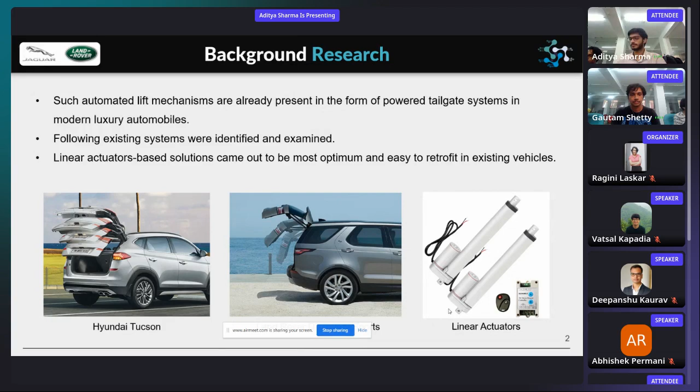One of the mechanisms we ideated was employing a simple slider crank mechanism coupled with a linear actuator on each side of the bonnet. Upon retraction of the linear actuators, the slider moves inwards and the crank moves up, causing the bonnet to lift. This mechanism was rejected due to the significant number of components, resulting in multiple joining points, hence greater losses of energy. This would affect the efficiency of the whole system drastically.

This mechanism comprises a linear actuator whose one end is mounted on the chassis under the bonnet, and the other is mounted on the bonnet itself. The extension of the linear actuator results in the bonnet pivoting around the chassis mount and lifting the bonnet upwards. The mechanism was selected as it consists of the least possible moving parts with which the said actuation of the bonnet can be attained.

Fewer components also implies better packaging and weight reduction. Moreover, the easy availability of the necessary parts in the Indian market further strengthened our conviction to move ahead with this design.

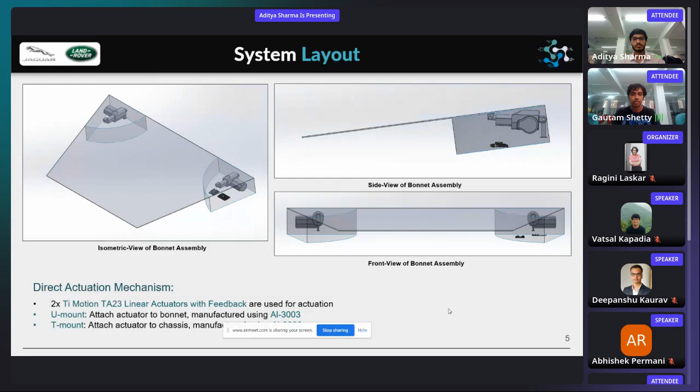The Cytron motor controller is placed on the left side, along with the Arduino, which will run the control algorithms. The Cytron controller will take power from the battery of the car and provide the appropriate PWM signal to the actuators. The IR sensors are also connected to the Arduino, which will sense the gestures and take the appropriate actions.

The powered bonnet can incorporate a gesture-based sensor, which allows automatic opening or closing of the powered bonnet by kick motion. Further, a safety feature can also be included, which stops the closing of the bonnet to prevent injury in case of accidental obstruction. These features would ensure ease of access and safety for the user.

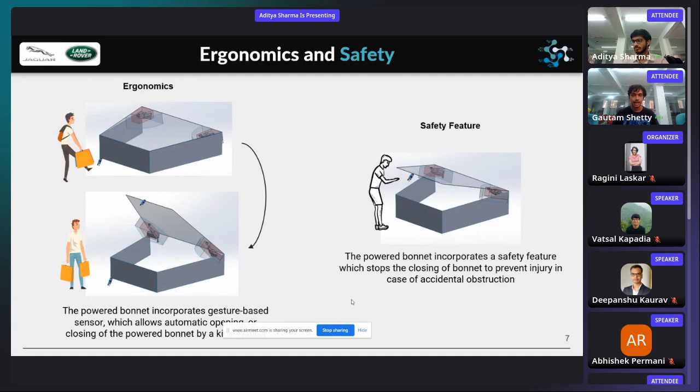In the closed position, we fit the whole mechanism assembly in 32.37% of the total available space. This again was made possible because a mechanism with the least possible moving parts was used.

Going over to the governing equations, here we have derived the mathematical equations necessary to model the physics of our mechanism using the parameters that are available to us. A free body diagram in motion was created to obtain the necessary force balance relations. The Simulink model on the right embodies the final differential equation attained in terms of the variables, that is, the actuator force and bonnet angle.

Another model was created to convert the input length variable from the electrical subsystem into the bonnet angle. The equation for that was derived through the geometry of the mechanism.

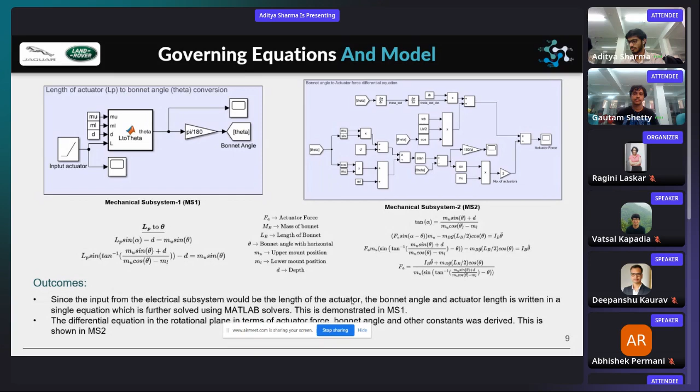Now we will look at the MATLAB scripts that we have developed. The equation mentioned in the previous section is solved here using the fzero solver present in MATLAB. The equation is solved numerically and the solution is usually obtained instantly. The bottom script is the master file, which contains all the necessary constants which describe our problem. The parameters here can be changed to obtain simulation results for a variety of different loading, mass, or time conditions.

Now over to Aditya Sharma.

After developing the mathematical models, we went on to select the appropriate linear actuator for our design. Since each linear actuator had different specifications, detailed simulation was done on each model to check if it was able to meet the requirements. After several iterations, we found that the TA23 linear actuator was able to provide the desired force and speed with enough leeway for further adjustments.

After selecting a linear actuator, we have to decide the exact position to mount it within the given space to us. For this, a 2D SolidWorks sketch was created to identify the optimal point. Two semicircles were drawn on the bonnet, and their intersection defined the viable points for a particular actuator.

These points were then input into a load model to determine the exact mounting positions that minimize the overall load during the entire cycle of opening and closing of the bonnet. In this way, the optimum mounting point of our actuator was estimated.

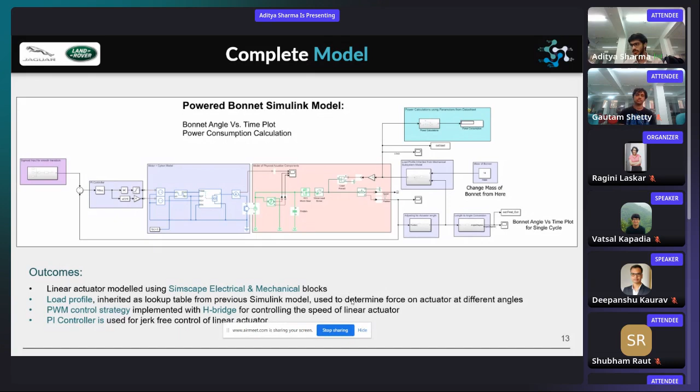Power consumption plot with different mass of bonnet is shown in the figure. It comes out to 300.3 joules for the 14 kg case. Also, the power consumption plot is observed to be almost linear for mass from 9 kg to 14 kg.

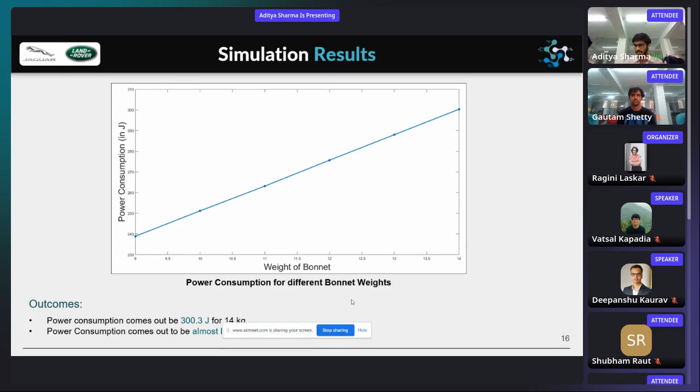The mounts are made up of Al-3003 and under the most extreme conditions of loading as per our design, the minimum FOS came out to be 1.34.

The mounts can be mass manufactured using the CNC machining technique. The simple design of the mounts ensures that the cost of CNC machining does not go very high. These mounts will be welded to the chassis and the bonnet, preferably using TIG or MIG welding.

Next, coming to the bill of materials, we were able to keep the total cost of all the components under 20,000 rupees. Also, all the components used are readily available in the Indian market, targeting the mid to high-end car segment.

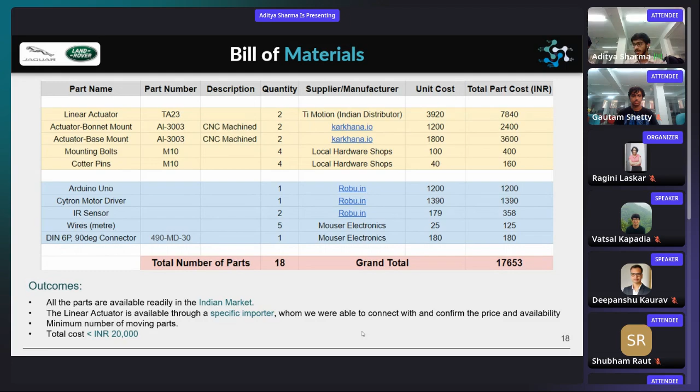The cost for this feature is quite manageable considering the performance offered by our design. It also contains the potential for the company to keep a good profit margin while offering these features to the end customers. The claim points based on our self-evaluation are tabulated in the following table.

Listed on this slide are some references that we used.

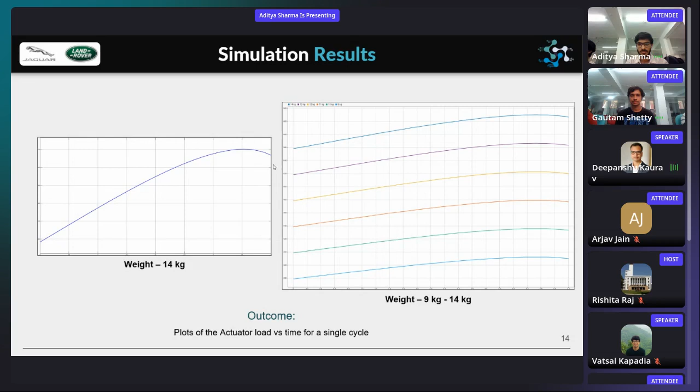Yeah, and another point is that the static load it can handle is much higher than 1000 newtons, 3000 or 4000 newtons. So there we have the greatest factor of safety at the static points. That is for the safety feature as well. Yeah, that's fine. So my question is, let's say you are closing your bonnet, and at that time someone puts their hand. How fast will your feedback system respond to that? Will it be able to stop?

So the feedback system will respond when the bonnet comes in contact with the hand, right? Or is there any other thing? Actually, sir, we have one more thing. We have incorporated an IR sensor. When anyone puts their hand into the bonnet, the IR sensor will sense their hand and it will stop. That's the additional safety feature. Okay, so the IR sensor is on the bonnet or somewhere else? Yes, it's on the bonnet, like here. Okay, this one. Okay, fine.

So a word on that IR sensor. Will the line of sight be sufficient, or how many IR sensors have you used to cover that particular part? For this system, we have used only two IR sensors. For the first case, if you have bags or something in your hands, you can open your bonnet using a kick gesture. And the second IR sensor is for the safety feature. So it's shown in this figure.

So you think one IR sensor will be enough for covering the complete bonnet? Let's say the child has his hand on the extreme right. Will that IR sensor detect that?

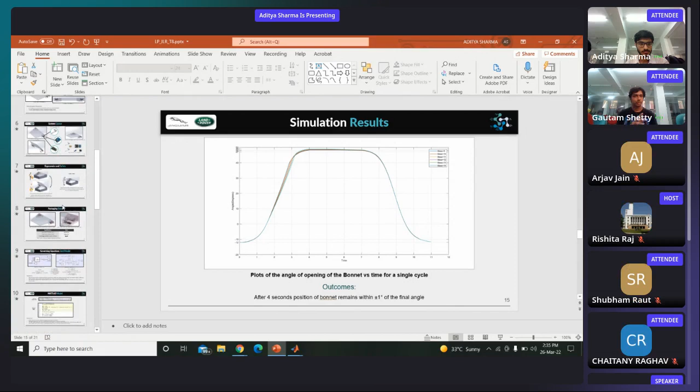So we know the curve of opening and closing. If there is any obstruction, it will deviate from it, and our system would identify it and stop the bonnet. So here comes the role of the linear actuator. Okay, it's basically a second layer of protection after the IR sensor. Yes. And also the potentiometer is for obstruction beyond the line of sight: if something above the bonnet is obstructing it from the upward side, the potentiometer would also identify that and stop the bonnet from further damage. Okay.

A question from my side. This TA23 actuator that you use, what's the fundamental idea? What sort of actuator is it? I know it's a linear actuator, but what mechanism does it use? It is a worm gear mechanism with a lead screw. Okay. And it has a Hall sensor for the feedback mechanism.

So one last question from my end, regarding safety. A lot of sensors and automation sometimes cause catastrophe. Do you have any kind of input for when a car is in drive mode, so it should never open automatically? That would lead to a very disastrous thing, right? Any input in your diagram from either a wheel or engine or something like that? Have you considered that? Definitely, if someone is driving a vehicle, this sensor should not work. This is for the static position of the car. All right.

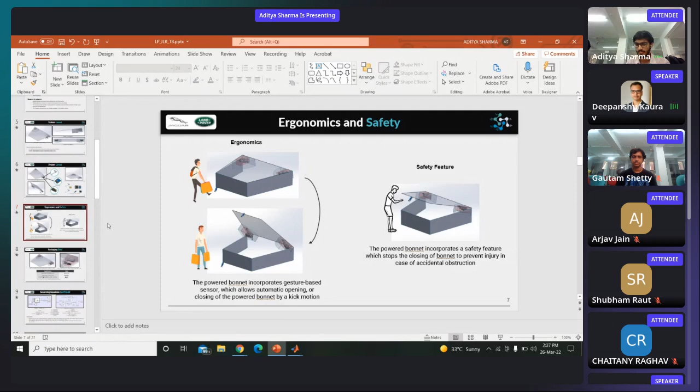If you can just go to the self-evaluation slide that you presented. There you have claimed packaging to be 24 out of 25. From what I see, the linear actuator hinges cover a major portion of the bonnet, on the major length of the bonnet, right? So on the sideways you will have shortage of space. You can't move some stuff sideways because you will have the arm of the linear actuator in that direction. So do you still think it will be 24 out of 25?

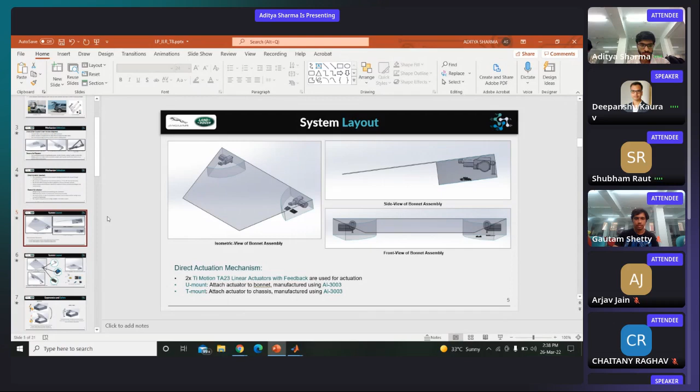Sir, are you talking about the side view of the bonnet? Aditya, can you go to slide number 5, please? You had a 2D drawing, right? Yes, sir. Are you talking about this one? Yeah, this is one of them. You had also shown a SolidWorks 2D drawing, right? Yeah, that was a sketch for the mounting points. This one, right? Yeah.

So what's the ratio of this hinge length to the overall length? That is the upper mounting position length. It is around 210 to 220 millimeters. Okay, then that makes sense. I can actually zoom it here. All the dimensions are mentioned here. Okay, fine. Thank you.

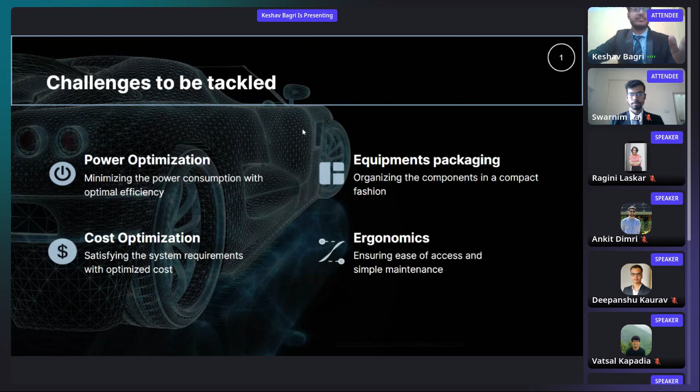We started with identifying the system requirements, followed by which we finalized the mechanism that satisfied our constraints. We have tunable parameters like the lengths of different links, the rating of the motor, using which we selected the off-the-shelf components, and based on the required ratings, the electrical and mechanical systems were finally simulated on Simscape to validate our design. And finally, the CAD was prepared, ensuring proper packaging and satisfying the required constraints.

To automate the opening, holding, and closing of the bonnet, we propose a 3R 1P kinematic mechanism in which a crank is hinged on the base to the motor at a distance of 189 mm from the hinge of the bonnet. A cylindrical pin with a roller is attached on the other end, which slides in a slot along the bonnet. The motion of the crank is facilitated by a motor and a torsional spring attached on the crank axially along the motor.

When the bonnet is open, the crank is past its dead center, and the weight of the bonnet pushes the crank towards the hinge, and this is how we achieve the mechanical stop. And because of the presence of this mechanical stop, the motor doesn't consume any power during the holding phase.

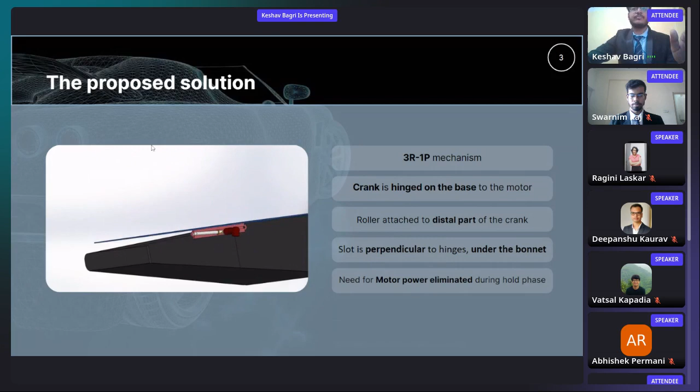The system that we propose primarily consists of four major components, namely the slot, which is mounted on the underside of the bonnet using bolts, a crank between the ground link and the slot, a torsional spring which is mounted on the crank axially along the motor, and the motor itself. This mechanism is symmetrical about the midplane of the bonnet.

Coming to the process definition, there are three phases: opening, holding, and closing. As the bonnet just starts to open, the crank rests along the base with the torsional spring under maximum compression. As the motor is powered on, it is assisted by the torsional spring, which rotates the crank and in turn lifts the bonnet. During this phase, the crank travels by an angle of 154 degrees, which corresponds to 60 degrees of the bonnet rotation from the initial position.

In the holding phase, the crank is rotated beyond the dead center such that a stable equilibrium is achieved, after which it is stopped mechanically to prevent any further rotation. And because of the mechanical stop, we do not have the need for motor power. Lastly, in order to close the bonnet, the motor has to apply an initial torque to overcome the dead center, post which regenerative braking torque is applied, such that the motor's torque and spring counter the acceleration due to gravity and result in smooth closing of the bonnet.

In order to determine the dimensions of the crank and the respective safety factor, we identified the maximum loading condition. Firstly, the crank undergoes pure bending when the bonnet just starts to open, and this force comes out to be roughly 181 newtons. In the second loading condition, in the final position, the crank experiences a compressive force of 661 newtons. Please note that these values were calculated for a 14 kg bonnet.

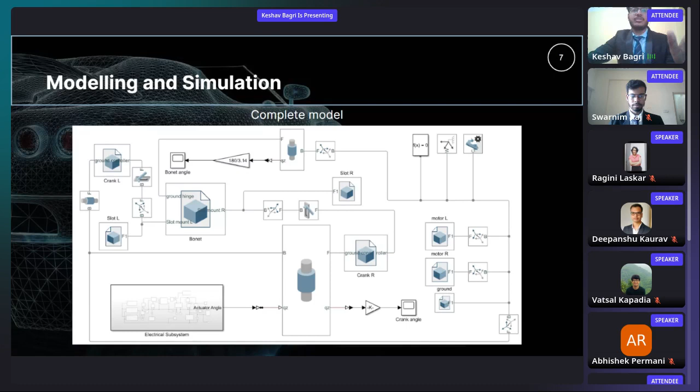Now, the entire model that we have prepared has been simulated using Simscape and Simulink modeling environments. We have used the CAD and parameterized the model using a MATLAB script, which ensures modularity. The electrical subsystem consists of DC motors and its controllers. The motor gets the load torque, and using the preset position reference of the joint angle, it generates the torque and gives the crank angle as the output to the mechanical model, which is then fed to the joint between the ground link and the crank.

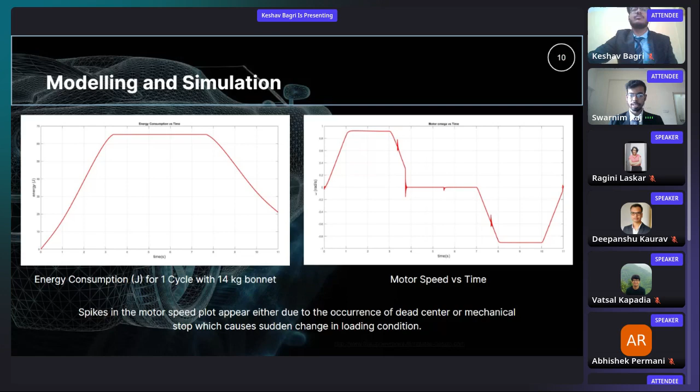To analyze the net energy consumption of the system, we have obtained the energy consumed during the three phases of the cycle. It can be seen that due to the presence of the mechanical stop, the system doesn't consume energy while holding the bonnet in the open position. Further, due to the usage of torsional springs, we have reduced the consumption by 46% for a 14 kg bonnet. Lastly, we have designed the system in such a way that the motors can provide negative torque so as to recuperate energy while closing the bonnet. We have also presented the respective values for a 9 kg bonnet.

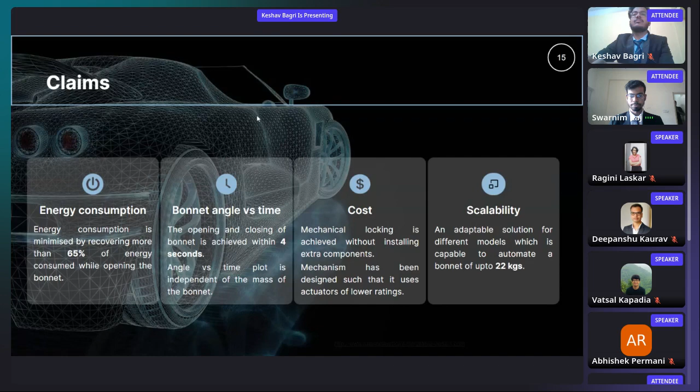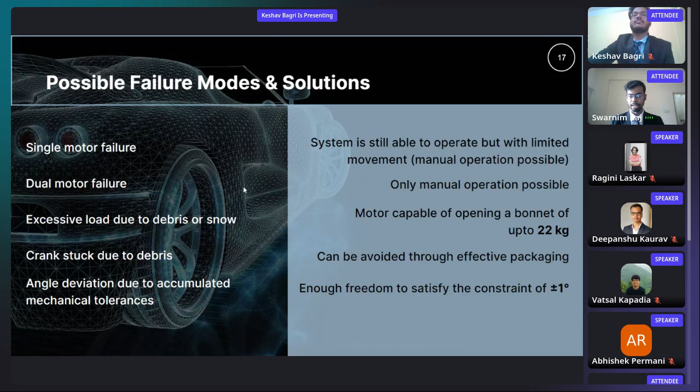In order to judge the effectiveness of a system, we have identified certain failures and how our system is robust against them. In case the motors fail, the system can still be actuated manually. The motors are capable of lifting a bonnet weight of up to 22 kgs and hence will be able to operate under excessive loading conditions caused due to debris or snow. By ensuring proper packaging, restrictions to crank motion due to debris can be avoided. Finally, our mechanism is within 0.5 degree of the specified target and hence has sufficient room for mechanical tolerances.

In the end, we would like to thank Jaguar and Land Rover for providing us an opportunity to work on this interesting problem. The detailed bill of materials, governing equations, and the manual load calculations in case of actuator failure are mentioned in the appendix. We would love to answer your questions now.

And now we can move on to the Q&A session.

Thank you, team, for taking us through the presentation. I'll start with the motor. You mentioned you opted for two motors, and I see the cost of your mechanism is quite low. Can you tell me what aspects you checked while selecting the motor?

While selecting the motor, the first aspect was the rated torque, since it has to drive a heavy bonnet. Then a 12-volt motor was selected so as to fit in with the auxiliary system of the whole vehicle. So those were the two major things considered: it should be a 12-volt motor, and it should be able to provide the required torque for the mechanism.

Did you also look into the robustness or reliability of the motor, and what's the life cycle for it? Yes, sir, there were standard life cycle data. In the data sheet there was a set of data for life cycles, and from that we estimated the motor can easily last for an average use of over 10 years. That is why we selected this motor.

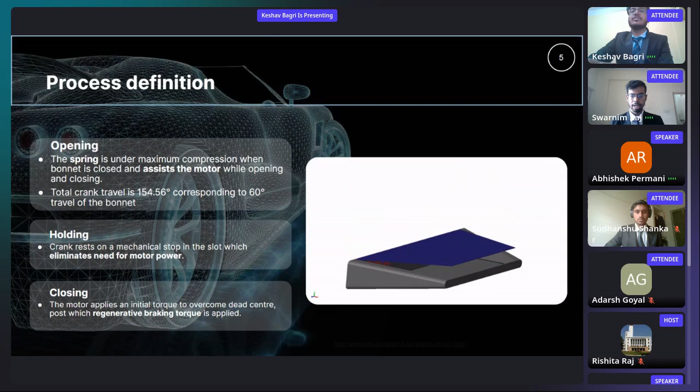Yes sir, so we have a plan for that. One of the things we can deploy is a current sensor for the motors. Whenever a hand comes under the bonnet, the motor will need to apply a much greater torque to close it. As the torque requirement increases, the current will increase, and that current sensor can be programmed such that as soon as the current increases beyond a certain threshold, the whole thing can reopen. That way, the safety can be ensured.

But adding to that, we can use an IR sensor or radar with a specified or required field of view, depending on what sort of area we want to cover. Yes, we can integrate both of them. Oh okay, cool, thanks.

You mentioned a mechanical stop for the closing. Can you give me more details on the mechanical stop for the closing of the hood?

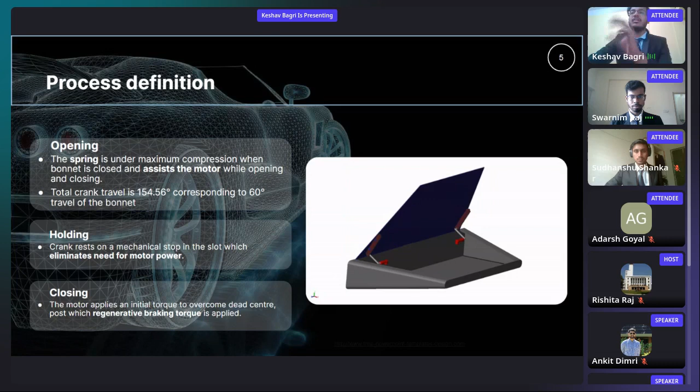Yes, so in this particular phase, as the motor reaches the dead center at 90 degrees, we push the crank slightly past that, 1 to 2 degrees after, such that since the crank is past its dead center, the bonnet will try to open, but the slot has an ending. If you can see this image, the slot has endings on both sides, closed on both ends. So if the slider reaches that point beyond the dead center, it won't be able to cross the slot. Essentially this position is locked, and since gravity will always try to pull the bonnet down, the mechanical stop comes into picture in this position.

Okay, in that case, there's a possibility that the bonnet might not go to the complete closure position, right? There's a possibility that a few millimeters of gap might remain between the bonnet and the bottom of the car.

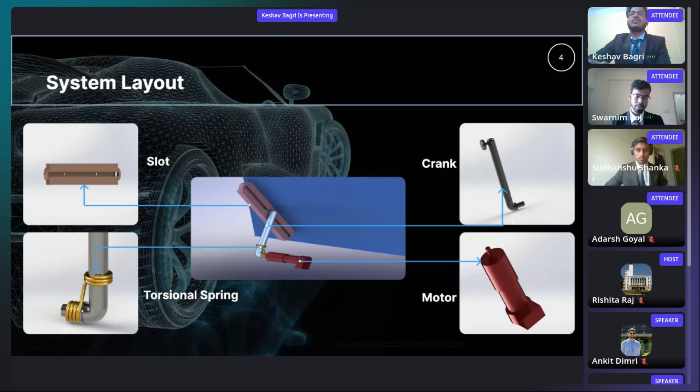So sir, just to clarify what Keshav said: there are two endings to the slot. One towards the hinge of the bonnet, which prevents it from closing back when it's in the open position. But the ending on the other side, the farther end of the slot from the hinge, is not restricting the crank from moving forward at that point. I hope you understand me.

Yeah, yeah, I got that point. I'm talking about while you're closing the bonnet. Okay, during opening it's getting locked. That is clear. So during closure, you're saying...

Is the torsion spring the only other mechanism allowing smooth closure of the bonnet, or is there any other mechanism? No sir, due to the negative torque applied from the motor and the torsion spring, both of them are controlling the speed of closing of the bonnet.

Okay. Adding to that, we have ensured that the torsional spring, during the entire motion whether closing or opening, is always in compression, so that it assists the motor at every point of time and basically opposes gravity, so to speak. Also sir, just to clarify, the motor is in a feedback loop, so there is no gap between the closing of the bonnet and the car — it closes to its fullest.

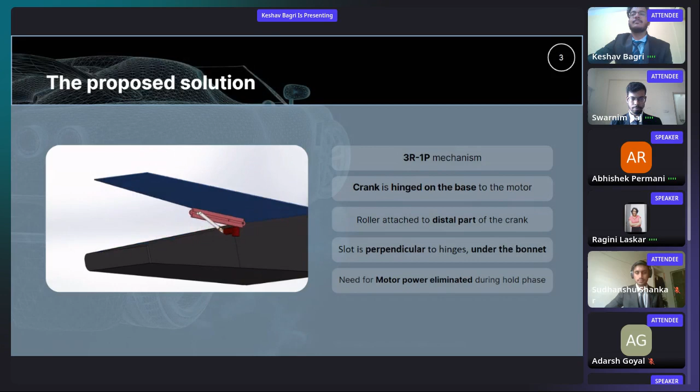Okay then, thanks a lot sir. Thank you very much sir. Thank you guys, have a good day. Thank you, thank you sir.

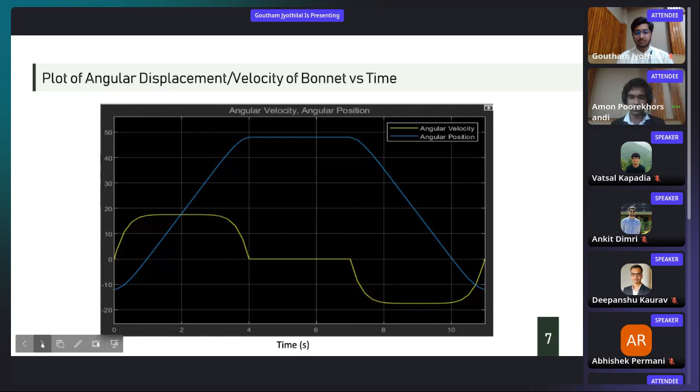Different mechanisms could be used to generate rotary motions. We considered using 6-bar mechanism and hydraulic actuators, which were discarded due to various complexities, high volume, and other inefficiencies. We also considered the use of electric linear actuators using Simulink.

The linear actuator problem was solved entirely for various actuator selection parameters. Actuator and controller satisfying these given conditions are custom made and cannot be implemented using marketplace solutions. This solution may be further explored when appropriate actuators are available.

So finally, an executable mechanism required for the application was determined to be a crank rocker mechanism. The mechanism was based on constraints like Grashof's law and the spacing limit provided. It would additionally have to permit the attachment of motor controllers and gearing systems if required. We also have to make sufficient clearance to prevent wear and tear.

The force kinematic analysis was done using the free body diagram to determine the torque requirements and the angular velocity relationship, with a reasonably approximate assumption of a massless link. The system governing equations have been derived accordingly. It resulted in a relationship between link length and the torque and angular velocity values of the crank link, determining the motor selection parameters. So now I hand it over to my other teammate.

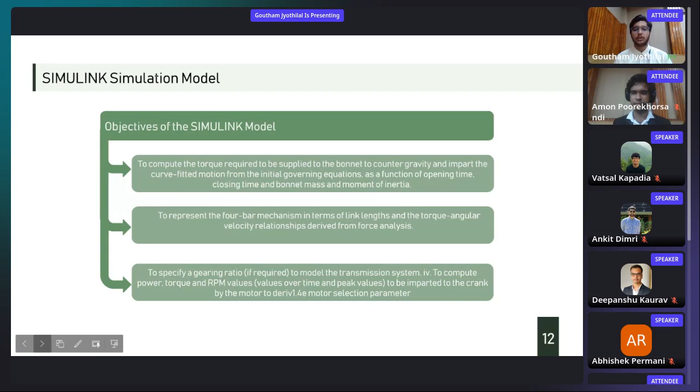Coming to the most important part of our submission, a complete comprehensive generalized Simulink model, which models our equations, requirements, mechanism, transmissions, and governing equations. While developing the Simulink model, our key objectives were to compute the torque required so that the curve-fitted motion can be generated, to represent the 4-bar mechanism in terms of its critical parameters such as configuration and link lengths, and also to specify a gear ratio and compute the same if required to modulate the torque requirements. Now let us take a look at the Simulink model.

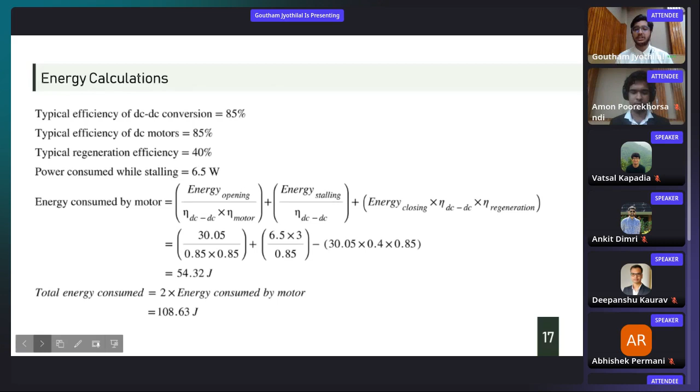Coming to energy calculations. Our critical objective while calculating the energy required for our mechanism was to calculate the energy at the primary battery level so as to get a clear idea of the overall solution. So by taking into account values of typical efficiencies of DC to DC converters in electric vehicles as well as DC motor power transmission, using the formula shown on the slide, the hand calculated value of energy turned out to be around 108 joules for our mechanism.

Apart from the various mechanical considerations as discussed earlier, the ergonomic aspects of the problem statement were looked into deeply as well. They were analyzed, and finally, certain essential elements such as safety, minimum space utilization, and ease of use were integrated into the model.

For a quick recap, I'll just run you through our working principles. We analyzed the problem statement, conducted a thorough literature survey, derived the governing equations using curve fitting, explored the potential mechanisms and finalized the 4-bar mechanism, did the analysis of the 4-bar mechanism and isolated its governing equations, fed those equations into a Simulink model that was generated for various data requirements, analysis of ergonomic aspects and integration of these elements into the model, and finally, an appropriate bill of materials was derived.

This brings us to the end of our presentation. I hope that we elaborated upon the salient features of our model. Thank you, and we are open to questions now.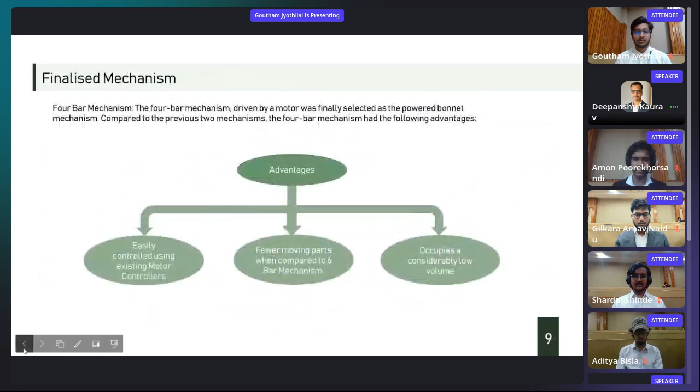Okay. And did you consider other mechanisms such as linear actuators? As you saw from the previous two teams. Okay, yeah, we made a comparison there. Can I? Yeah, I'll just continue. So yeah, we considered a linear actuator. We actually made a Simulink model too. So yeah, we have considered other mechanisms too.

Okay. So, what was your primary criteria for selecting this particular mechanism? I see a lot of numbers there. Yes, sir. As explained, we tried the 6-bar mechanism and hydraulic actuator, which were directly discarded due to their complexities, inefficiencies, and high volume. Now, coming to the linear actuator, this was explored slightly more. We ran the Simulink model, and linear actuators are actually used in existing tailgate solutions, but here our situation is a little bit different. We have a higher mass, and we are required to generate a particular motion within a given time frame.

So this would result in load-speed characteristics of actuators, as mentioned here, the maximum velocity and the maximum load coming on the actuator. These are not compatible with existing actuators. So we had to look into a simpler mechanism which could be achievable using better control. And hence, we moved on from the linear actuator to 4-bar mechanisms. Okay, understood. Thank you.

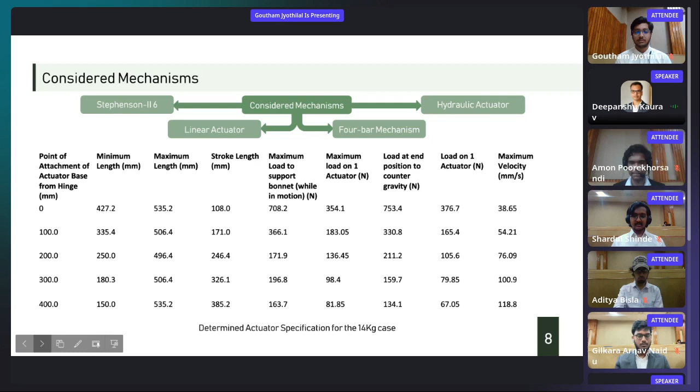Just one more question. Can you go to the image of your mechanism? Yeah, this one. Can you please tell me the ratio of distance between the hinge for the bonnet and the hinge for the actuator, and the length of the bonnet? Okay, I have the values actually. Our distance from the hinge to the bonnet link is 364, and the distance between the hinge and the axle of the motor, the axle of the gear, is 122. The entire mechanism was designed in such a way that it fits into the space provided.

Okay, because that's where my question was going, whether it's fitting in the space provided or not. Yes, sir. From the image, it looks like it's going out, so I just wanted to confirm that. The hook attached to the bonnet is at the longer side, but we have made sure that it fits in the space given in the problem statement. Okay, thank you. That has also been depicted in the submitted CAD model. It can be verified. Okay.

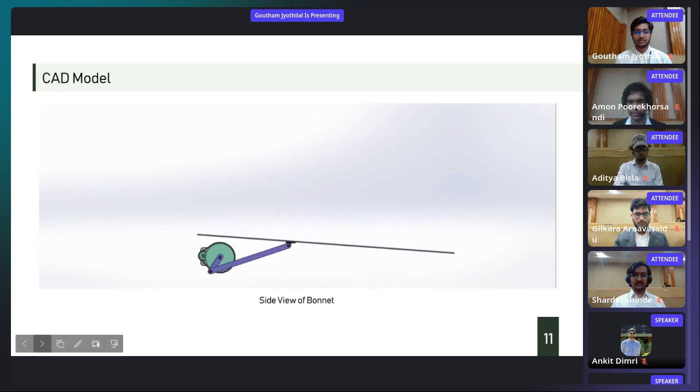So regarding the safety of this entire mechanism, what have you considered altogether? Like, what kind of things have you considered? Okay, so I'll take that up. So the safety part, we thought of putting IR sensors, but we didn't work upon that because that comes a little under the control side. So we could have explored it more, but we weren't sure if that is the, what do you say? Elaborating further upon that, apart from the control side, for safety we have ensured that the mechanism is as slow as possible, and physically the mechanism does not consist of any sharp components which might harm the user.

So how many IR sensors have you used in the design currently? So I'll be taking that question. In the problem statement, we were given that the main aim is to create a mechanism that will successfully open and close the bonnet within the given stipulated time and create a smooth motion which can be controlled without manual power. So our focus wasn't on the control and safety side, how the whole mechanism would be controlled, but rather the physical mechanism. So we did research on some sensors. We can use a few sensors on the system, but we didn't go that much into the research part.

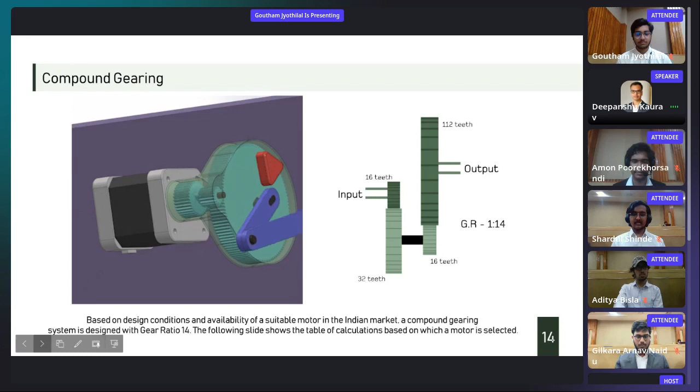Just one more thing. You have put a stop, this red stopper in the current image, for the open position of the bonnet, right? So wouldn't that be a critical component, prone to failure, because the cranks and that stopper will continuously come in contact each time you open them? And looking at the width of the crank, those two components might be susceptible to failure, right? So have you done any study on that?

Yeah, actually. So what we are doing is making sure that the velocity becomes zero at the stopper. So we have taken omega that way. So the chances of that happening are very low. Okay, understood. Also, sir, that stopper shown in the image is just for representation. The dimensions and the shape of the stopper will not be the same when the model is implemented. It will be implemented in the body of the vehicle only.

Okay, just to continue the question regarding failure. You said you can open the bonnet manually, but how would you lock the bonnet at a position, because now the motor is freely moving? Sir, I'll take that question. The problem statement was intended towards automatic powered bonnets, so that's what we have done here. But for a manual mode, as a backup, we may use support struts as used in current bonnets, which can be manually attached to latches. So it's just a question of adding extra latches to the end of the bonnet so that the support struts may be engaged manually. That would just be a backup. Okay.

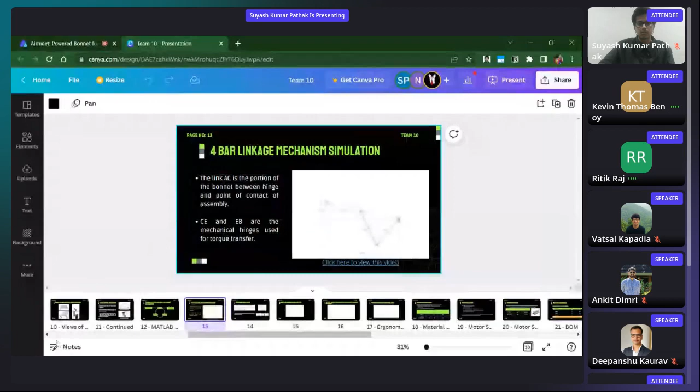So, am I audible? Yes, you're audible. I guess all the participants have joined. Okay, fine. Yeah, you can start.

Okay. Good afternoon, everyone. We are team number 10. Here we are about to present a solution for the low prep problem of powered bonnet for electric vehicles prepared by JLR as part of Inter-IIT Tech Meet 10.0. Speaking broadly, we have covered the following topics such as the design and the simulation models of our mechanism.

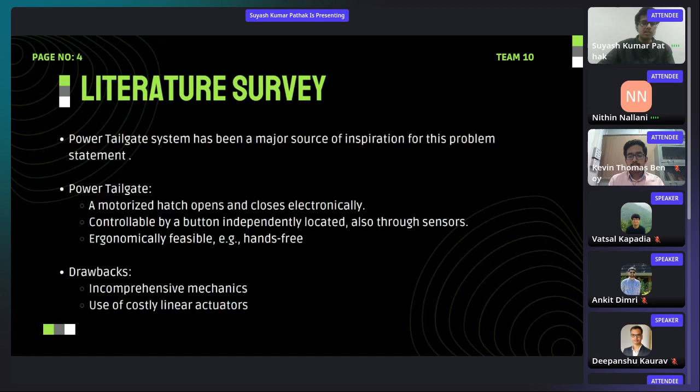Our problem statement was to simulate the working of a powered bonnet for an electric vehicle. We shortlisted a few parameters considering which a design had to be made, some of which are affordability and design simplicity. As mentioned in the problem statement, there has been some research in power tailgate systems that mostly used actuators. But actuators tend to be costly and any maintenance is done by replacing the whole assembly.

After going through some papers and designs of mechanical hinges, we tabulated the features of the following three design systems. Starting with the dual actuator mechanism, this is commonly used in regular cars, which use automated dampers. Moving on to the next system, the 6-bar linkage mechanism. It's a variant of the 4-bar linkage system and is very complex. The worm and worm gear mechanism is our proposed solution to the design problem. So why did we choose this as our solution?

The major features that support choosing the worm and worm gear mechanism were cost, complexity, number of moving parts, and repairability or ergonomics. For example, in the case of repairability, we have two mechanical links and a worm and worm gear attached to the motor. These are fundamental components and hence cost efficient and easy to replace.

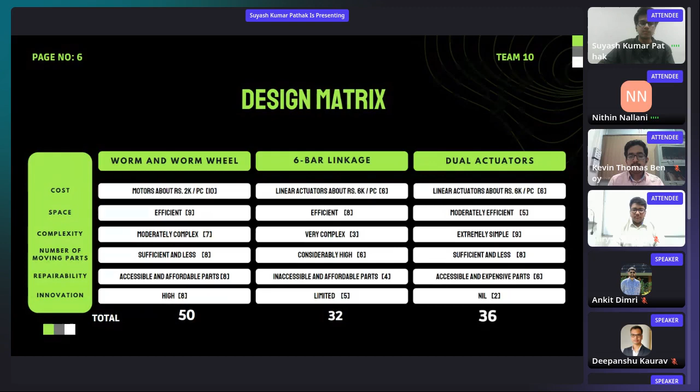So how does our system work? We have a DC motor powered by the car's auxiliary 12-volt power system, which is run through a worm and worm gear mechanism, which reduces it sufficiently to have enough torque to rotate the linkages and lift the bonnet. A feedback system is added to regulate the opening and closing of the bonnet without any jerks.

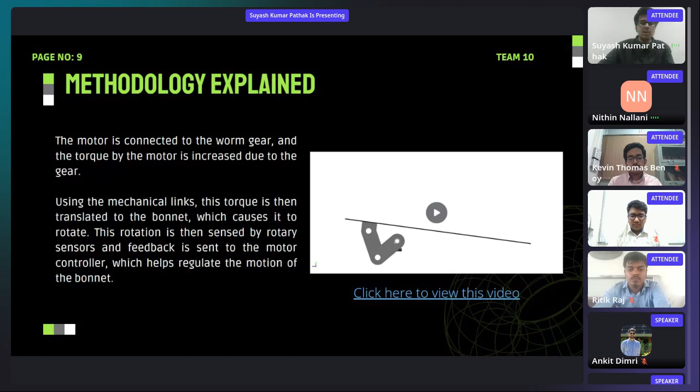Worm gear is used to convert the torque provided by the motor up to a sufficient amount, which is further used to lift the bonnet through the mechanical linkage. We have used the worm gear mechanism because it can be rotated through the worm only. So if we do not rotate the worm, the bonnet will remain at a fixed angle without any energy use.

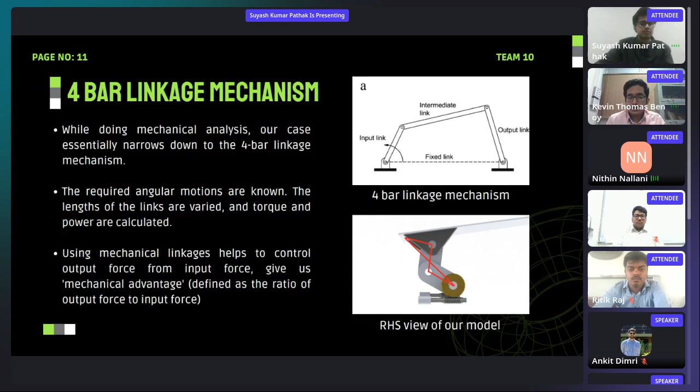Next, we decided the lengths of the links and the torques required using an iterative procedure, which involved the simulation of a 2D model. We started by deciding the rough limits of the link lengths. We then iterate over the lengths of the links and calculate the required torque. We then compare these torque values to find the lengths of the most efficient linkage systems. This is a simulation of the simplified 2D model, which clearly shows that the model is working with the shown lengths. The line AC is the bonnet, while CE and EB are the first and second mechanical links respectively.

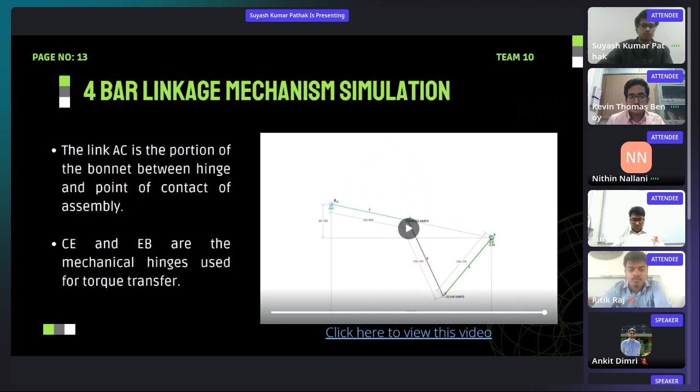This is a plot of the torque required from the motor versus the angle of the bonnet. This is based on the governing equations mentioned in the previous slides.

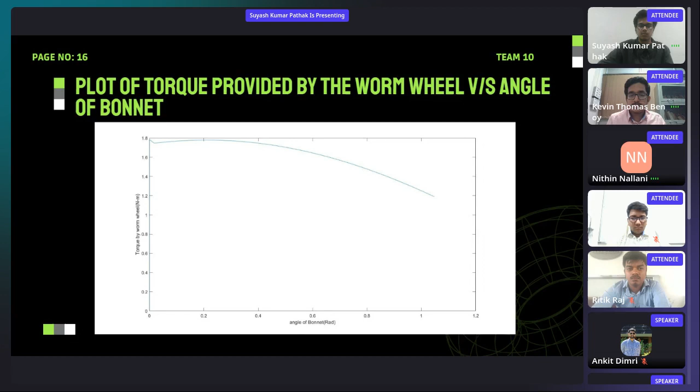After the simulation, we found the bill of materials, starting with material selection. Based on load-bearing capacity, we have shortlisted aluminum and steel. We have included a comparison between aluminum and steel and finally chose stainless steel AISI 1018 as a final material. In addition to these figures, we also know that aluminum is not easy to work and leads to faster wearing of tools.

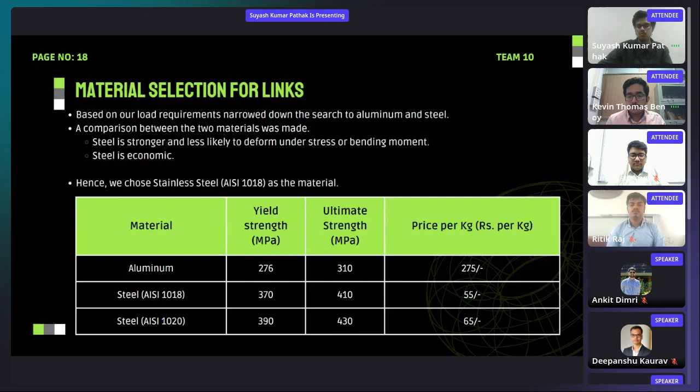We then went on to motor selection for our model. We needed a motor that is easily controllable, can absorb sudden rises in load effortlessly, and have high starting torques. These are the characteristics of a DC motor. In addition to this, we required a motor that can provide high torque at low RPM. So we used a planetary gear DC motor that can go to lower RPM than a general DC motor.

These are the parameters for our motor selection. We selected the PGM 45775 planetary gear DC motor from Orange Motors as a mechanism driver and use an Arduino controller system to get the optimum output.

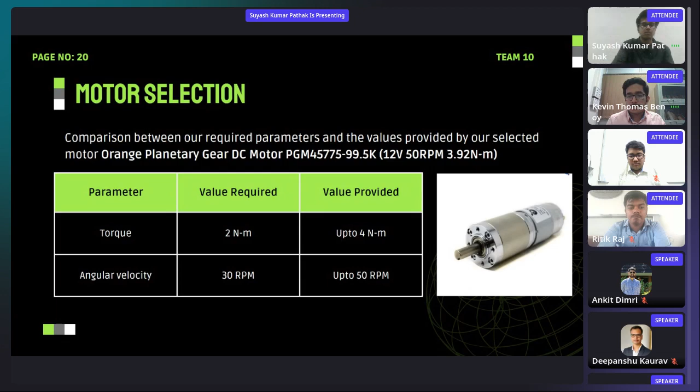The final cost is rupees 10,000. Miscellaneous costs include small equipment like push buttons, bearings, machining costs, etc. As you can see, this amount is less than half the cost of a fully electric liftgate system available in the market.

This is the SWOT analysis of our model. The primary strength of our model is affordability and simplicity. Using a worm and worm gear mechanism gives us a mechanical advantage that rotating the worm wheel will not move the worm gear, and hence the bonnet could be held at any angle possible. However, our model is a bit exposed and can be improved by introducing a casing.

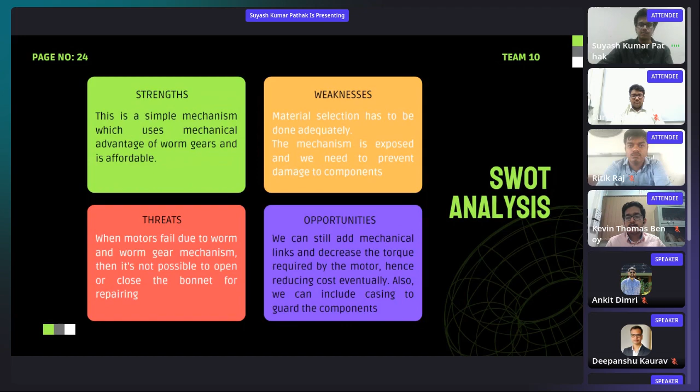Pushing to the ergonomics, we have thought of keeping a push button, pressing which starts the bonnet opening process, and pressing it again stops it. Since the mechanism is at the edge of the bonnet and consists of minimum moving objects, it is easily repairable.

As we have mentioned in the threat section of our SWOT analysis, our model fails in the case of motor failure. To solve this, we have also introduced another rotary shaft, which is possible because one end of the worm gear is free of any connections. This makes the bonnet opening manually feasible and reduces the dependency on automated systems.

These are the resource links which we have used while making this project. And it concludes our presentation. Thank you. We are open to questions.

Thank you, Suyash. Thank you for the quick presentation. So, can you just explain? At the end, you mentioned that you have kept a secondary mechanism to allow manual opening or closing of the bonnet. So, can you please explain this mechanism?

Sir, actually, we have kept the motor in front or below the gear mechanism. So, what makes introducing this rotary shaft feasible is that there are two ends to the worm gear, right? So, one end is connected to the motor, and the other end is free to rotate. So, what happens when the motor fails? As we have used the worm gear mechanism, opening and closing the bonnet is not feasible in that case. The only way to open the bonnet is by rotating this worm gear.

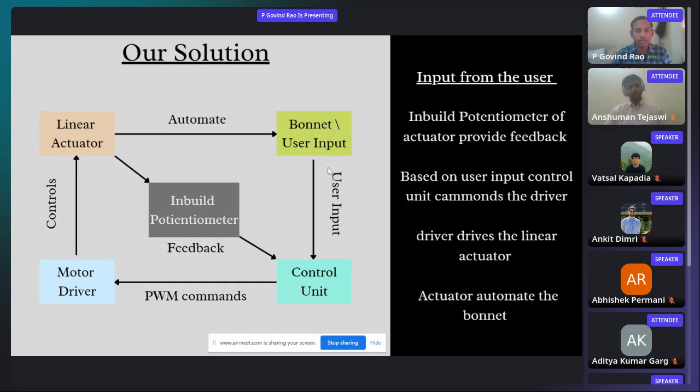You might be wondering why we chose the linear actuator. As I mentioned, we went through all resources and tools present in the Indian market. We considered other options like servo motors or stepper motors which have much faster and greater action, but the problem with those actuators is that size and cost increase as the load increases. So after analyzing price, efficiency and everything, we selected the linear actuator as the best suitable tool to solve our problem.

The next thing is our circuit diagram. You can see the motor driver is connected to the linear actuator with a 12 volt DC supply. Our linear actuator will be of 12 volts.

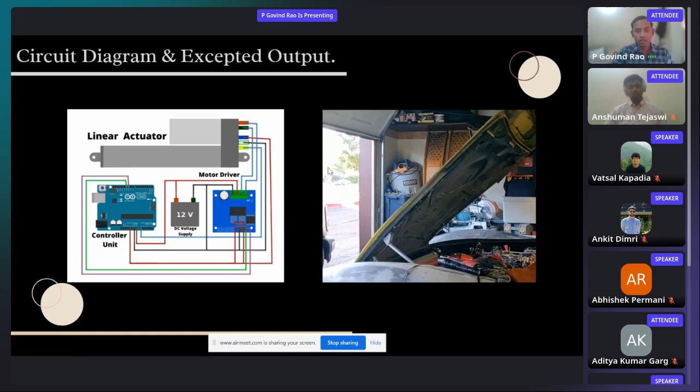While solving this problem, we expanded our domain, not restricting it only to electric vehicles. We wanted it to be applicable to every car present in the market. The controller shown here is an Arduino Uno, which is very similar to the Node MCU. This is the circuit diagram, and next you can see our expected output.

You can see the bonnet lifting with the help of the linear actuator. So coming to the next part, the linear actuator was a tool we wanted to use, but how do we find exactly where we wanted to mount it?

We were given in the problem statement a radius of 40 centimeter working space and 15 centimeter depth. Keeping that constraint in mind, we hinged one point of the linear actuator on the hood, and the next point was found using the two stroke lengths of the linear actuator.

When the stroke is at zero, one circle is drawn, and the other circle is drawn at the maximum stroke of 12 centimeters. The point of intersection of those two circles gives us the hinge point for the linear actuator. In this way, we optimized the position where we wanted to hinge it.

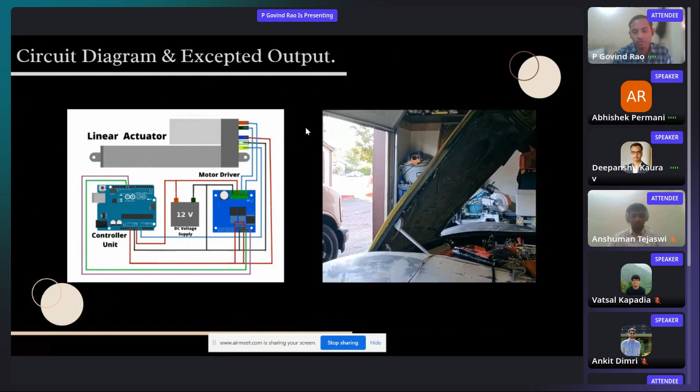But we are in the process to implement it. In our college, we are trying to make it as a product, and want to proceed forward with the problem statement. How would you use that in the college, for the regular purpose, or some specific project you are working on with the college students?

Sir, actually, our college is more focused on product development, and we are seeing this model or this project as a product. So we want to move it further. We want it to be cost effective, and we want to implement it in the market. So we want to take it as a project. We have the NVCTI product development center where we want to take this problem statement and develop it more. We are not limiting ourselves only to this competition or interaction.

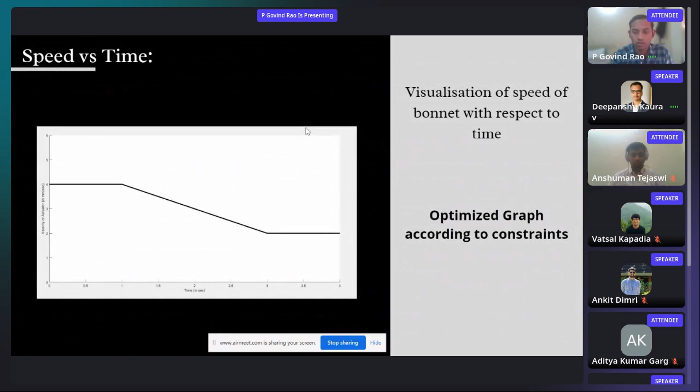Can you go to the operation range? You described the velocity, angular velocity, as well as the position. Yes, sir. So the next slide after this. So angular displacement of the point. What in terms of the angular displacement? So you are taking it to 60 degrees, right? Yes, sir. So you are starting from 0 degrees to 60 degrees.

From the CAD that I saw, if you go back to your CAD, please. Yes, sir. Okay, so your top surface is the surface for which you are showing that angle, right? 0 to 60 degrees. Yes, sir. Okay.

Fine, that makes sense. Regarding the actuator, since you mentioned very low cost for your system, you have taken 2,000 rupees cost for your actuator. Can you please tell me the specification of that? Yes, sir. Actually, we were asked to give proof of everything, so we have searched all the market suppliers. That's fine, I just want to know the specification for the actuator. Yes, sir, for that I am coming. We have everything attached.

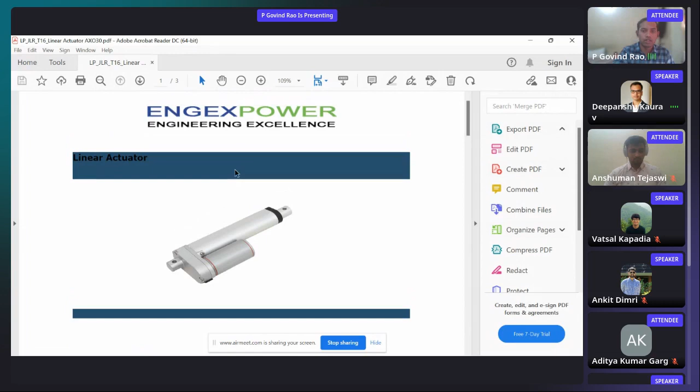So this is the linear actuator AX030, from Engexpower Engineering Excellence, a company based in Bangalore. They were providing it for 2,000 per piece, and this is the specification of the motor. The actual motive of selecting a 12-volt motor is that we can implement it in any car, because cars come with a 12-volt battery. We have a rated load, a maximum load of 45 kg, at which it can move 3 centimeters per second. And for the static load, we have about 90 kgs.

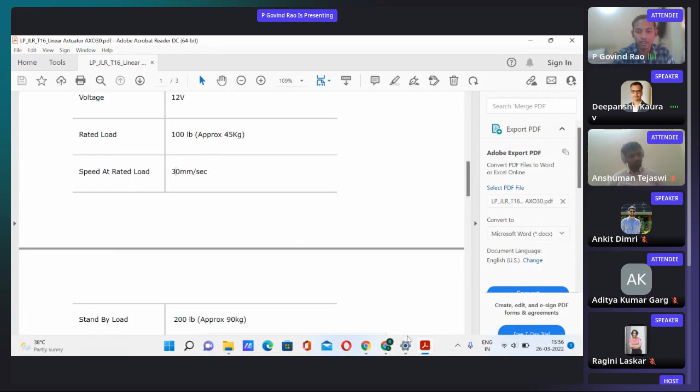What's the working load? Sorry, I forgot. It's 45 kgs, right? Yes, sir. Okay, and does that satisfy your requirement? What's the bonnet weight that you have taken? It's about 450 newtons, right? As we calculated, on the slide you can see, we were getting a maximum load of 137.66 newtons. If you can maximize that slide, I just want to take a look at the calculation. Yes, sir.

456. Okay. The bonnet weight that you have used is 14 kgs, right? Yes. Okay. Thank you.

A question from my side. This actuator that you are talking about, what is the fundamental principle for this actuator? Is it electromagnetic, or is it lead screw basically? Yes, sir. It's lead screw based with a feedback loop of a potentiometer. So basically, as the thread increases, the potentiometer tells us the stroke length.

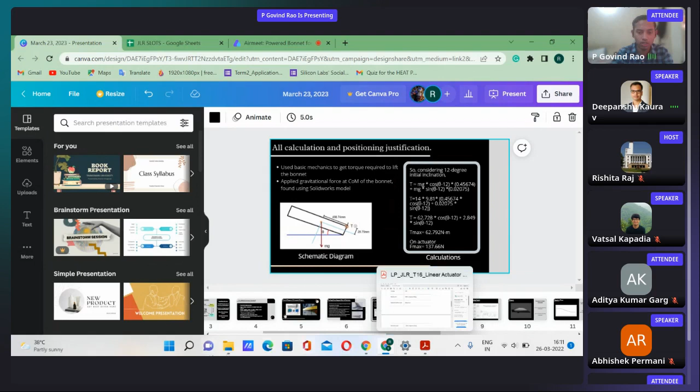Let me show you the complete document where we have calculated everything. So this was the calculation. So you calculated the torque value. Torque value is correct. From torque value to the force value, that's the calculation I'm looking for. You can scroll down. Actually, sir, sorry to say, we have not mentioned it. But as we calculated, it was in the limit of 4. Okay, because I highly doubt the calculation.

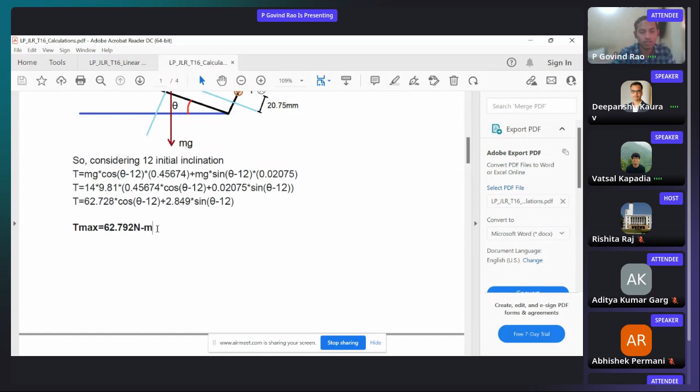So, Anshuman, can you show me the CAD design where we can get the needs from? Anshuman will be showing you the CAD design, with which we can calculate it out. In the meantime, if anyone has any other question, you can take that up. I think that's the only doubt for me. I'm okay with the rest. Any questions?

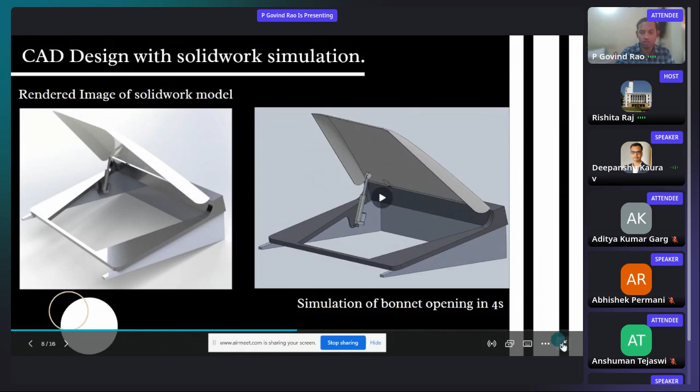Are you showing the CAD design, or can we move to the next team? Yeah, I think we can move on to the next team. It might take some time. Okay, fine, cool. If they want, they can present it at the last. Okay, sir. Just give me some 5 minutes. After the next team, we will show you the calculation. Okay, so team number two. This is the last team. You can raise your hand.

I guess everyone is present on the screen. Yep, I guess. Okay, you can start the presentation. Yeah, I'll just share my screen. I hope my screen is visible. Yeah, it is visible. Yes, it's visible. Okay.

Hello everyone. We are Team 2 and we'll be presenting our work on the topic of powered bonnet for electric vehicles. The task was to automate the bonnet of an electric vehicle to open and close with just the push of a single button. So here's a list of topics that we'll be covering in the next few minutes. We'll be starting from the mechanical design and going all the way till the bill of materials. So let's get started.

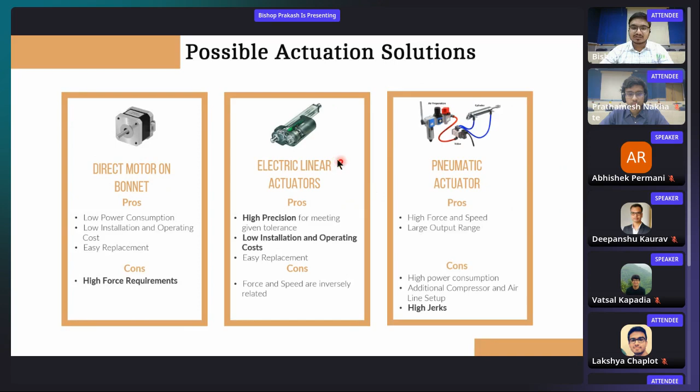So the most important question here is how are we planning to drive the bonnet? For that, we have some possible actuation solutions. The first one being planting a motor directly at the hinge of the bonnet or somewhere else and using a mechanism to apply the required torque. The second could be to use electric linear actuators and apply a force to generate the moment. And third could be to use pneumatic actuators, working just like electric linear actuators but based on the principle of compressed air pressure. After analyzing these three actuation solutions, we figured out that we'll be taking electric linear actuators, owing mostly to the high precision that we want, because the problem statement requires a 1 degree strict tolerance in the position of the bonnet.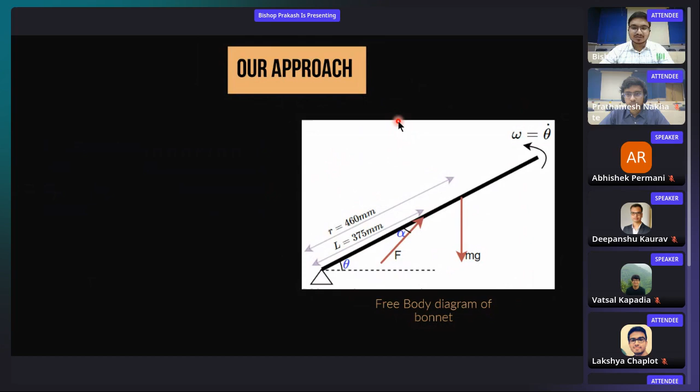So this is a visual representation of how the system would look, to better understand the forthcoming details of the project. Once we decided that we are going to be using electric linear actuators, we went into the numbers. A very natural approach would be to use two linear actuators on either side of the bonnet, but we figured out that that is just too much resource at work. So we boiled down to using one linear electric actuator and one hydraulic lift to support on the other side.

Once we were done with the configuration, we came to finalizing the orientation. To maximize the moment output from the force, we would obviously want to keep the point of application as far away from the hinge as possible, and at the same time, to decrease the extension ratio, we have kept the other fixed point of the linear actuator vertically below the hinge of the bonnet.

Now moving on to the governing equations for the plant. As shown by the FBD, there are two major forces, the gravitational force and the actuator force F, and a simple torque balance across the hinge gives us the governing equation of the plant, whose implementation in Simulink can be seen. Next slide. Next is choosing the controller. We started off with a plain vanilla simple PID controller, but when we started to play with the gain values, we noticed that no matter what we do, the curves of omega versus time were very sharp and had a very steep gradient.

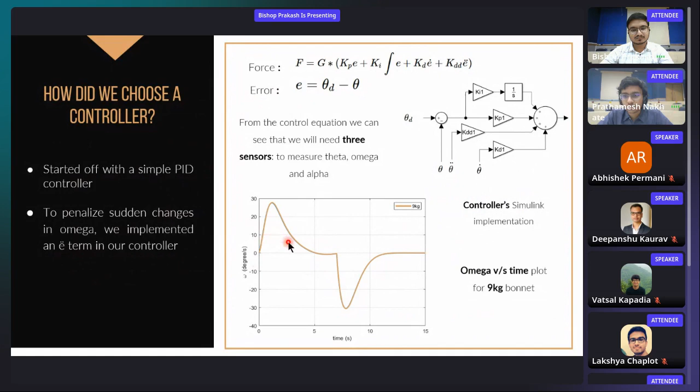So here's where we have made a very novel design choice in the controller. We have implemented an alpha term which penalizes large values of alpha, the theta double dot term, in the feedback that you can see. When we implemented this, it worked as expected, and the omega curve, as you can see, was now quite smooth. This controller's implementation in Simulink can be seen.

Next slide. Now, after we had done the simulation, we got that we needed a maximum extension rate of 124 per second and a peak load of 450 Newton. So, based on some market survey research, we found a company named Linak whose actuator LA36 met all those specifications. So, we went ahead with that.

Next slide. As we had discussed in our approach, we are using one powered linear actuator and one hydraulic actuator. To make sure that this design choice doesn't compromise the static structural integrity of our bonnet, we did some simulations in ANSYS, and the results showed that we had a safety factor of 10, and the deflection was limited to 1 centimeter over the entire meter length of the bonnet.

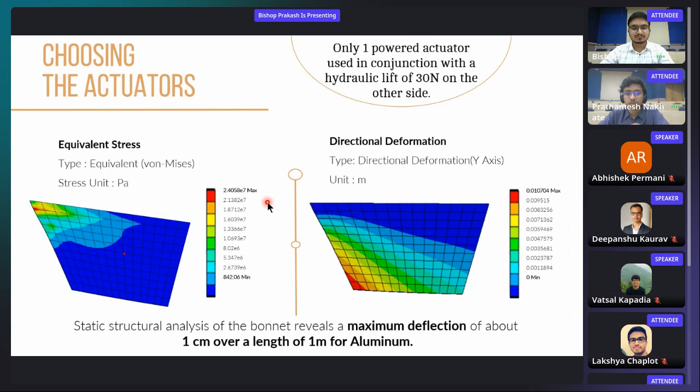Next slide. Now moving on to the practical stuff, tuning. First, to make sure that the theta curve starts with a zero slope at both angular extremes, we balanced torque, and this gave us the initial value of Kp. Then we made some reasonable guesses for the other gain values, and tuned them to get our desired theta versus time curve, and also made sure that the omega and alpha curves didn't have steep gradients; they were smooth everywhere. Then we iterated over this process to arrive at the final gain values.

Next slide. Coming on to gain scheduling, we have implemented it in mass range and in time range. Gain scheduling in time means we have two independent sets of gain values for the upstroke, when the bonnet is going up, and for the downstroke. By doing this, we can independently tune their parameters and hence get optimal performance in both strokes.

And we have implemented gain scheduling in mass range to make sure that the tolerance of plus minus 1 degree is met for the entire 9 to 14 mass range that was given in the PS. A very good observation is that all the gain values, Kp, Kd, barely change for the entire mass range. This proves that our model is quite robust to change in mass of the bonnet.

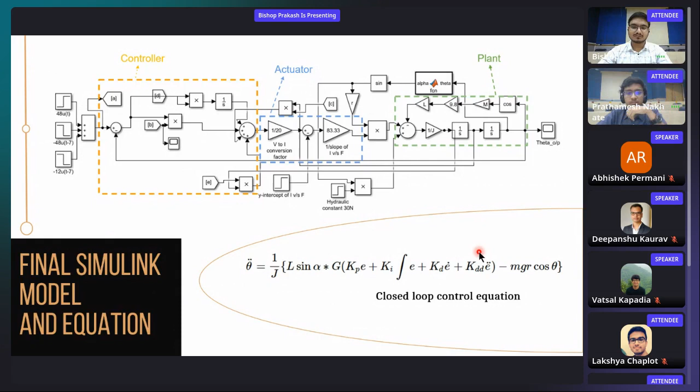Next slide. So this is the final model. Everything has been explained. The actuator is the only remaining thing, and that model we got through the data sheet of the Linak LA36 actuator. They give this relationship, and the final closed loop control equation can also be seen.

Next slide. Coming on to some important plots, the theta versus time plot, as you can see, is very smooth. There are no sudden changes and it is within the tolerance band at both 48 and minus 12 degrees. And the average power consumption is 250 watts over an 11 second cycle, which translates to about 7.64 × 10^-4 kilowatt hours of energy consumption.

To compare these numbers in the industry, JLR has an electric EV, the I-Pace, whose battery pack is rated at 90 kilowatt hours. So our energy consumption is quite low compared to that, which is a plus point. Now I'll hand over to Vishak to wrap things up.

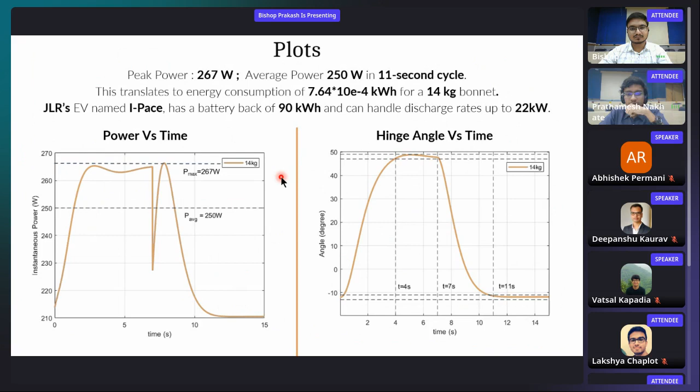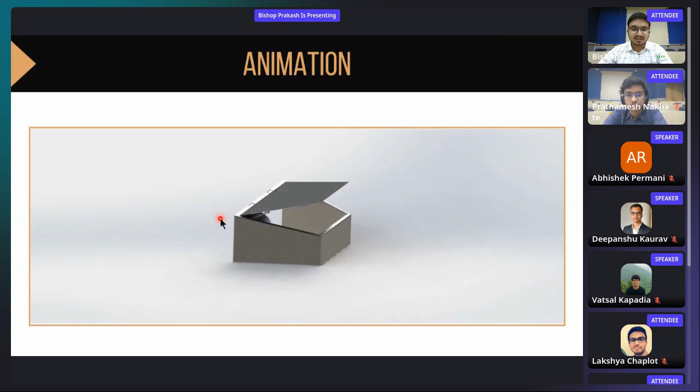Back to the most appealing thing here, the CAD model. This diagram shows very clearly the positioning and orientation of the linear actuator with respect to the bonnet, and it is very well constrained into the white space. We have an animation here to show the working of the system. It opens in the first 4 seconds, holds for 3 seconds, and closes in the next 4 seconds, exactly as directed in the problem statement.

So, to conclude, we'd like to say that all the requirements were successfully met according to the problem statement, and we have come up with a very simple design with only two moving parts present. And we have focused maximum on getting a very smooth operation with no jerks anywhere and satisfying the tolerance limits.

We have very low power consumption, which is less than half percent of the energy that is available in an electric vehicle, and even in a regular vehicle the energy is very less compared to what is stored in its battery. Next, we have very low space consumption. We can give nearly 98% of the total boot space as a usable space to the user. We are cost effective for such high end linear actuators.

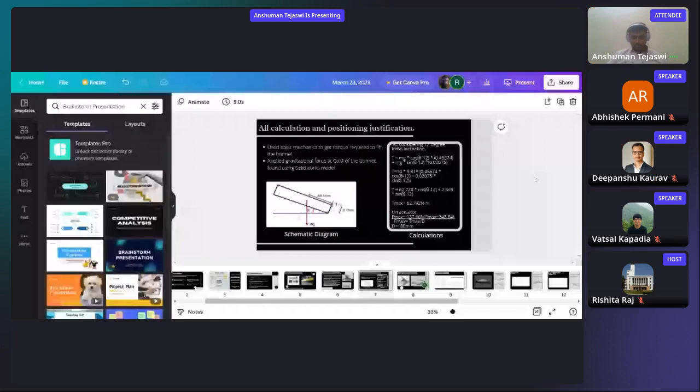Yeah, it is visible. Yes, so I think we have missed the point - here only we have described the distance between the bonnet and the hinge, that is the two hinge points - the actuator and the bonnet hinge point. That is about 180 millimeter.

Okay, that's 180 mm, right? So if you go back, sir - there are some miscalculations. You were right, sir. So previously F max was 137.66 Newton.

So, after correcting it, we got an optimized value of F max equals 348.84 Newton.

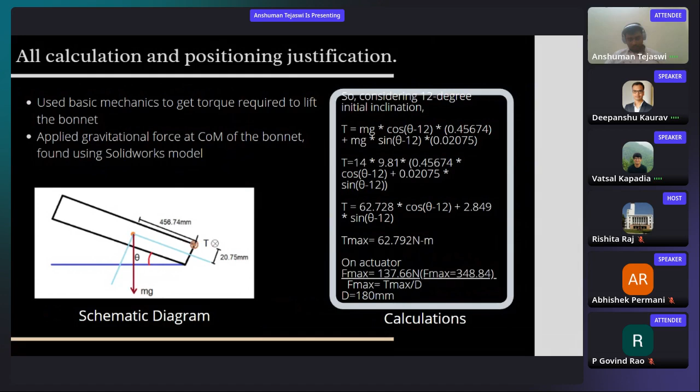Is it directly perpendicular to the bonnet, or is the actuator connection at some angle? If it's at an angle, that will further increase the force required. The angle between the bonnet and the actuator would actually be transient, so the distance won't be based on a fixed 180 millimeters, but on the opening position it is on. The value would change.

Yes, the angle value will change. Actually, the calculation is done at the minimum, when the angle is zero, like when the bonnet is in the closed position. Considering that as the maximum, as the bonnet rises, the load will eventually decrease.

You can't say that's the worst case situation, right? You'll have to check other angles as well. There might be some angle where, since the angle between the bonnet and the actuator is changing, although the overall force is lower, the angle is higher, so the effective normal force on the actuator could be higher. You need to check that as well, right?

So we will optimize our equations, as it appears there must be some miscalculations.

Yeah, I understand, it's okay. Thanks for the clarification. Thank you, sir.